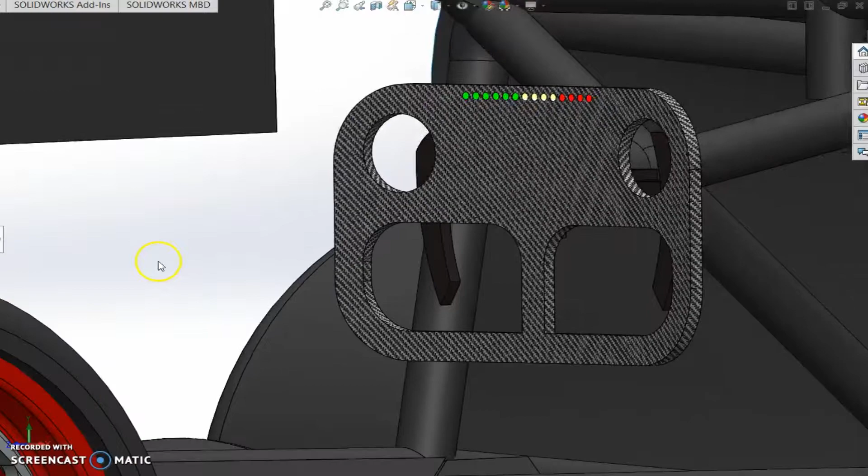The steering wheel will be manufactured using a CNC router that we learned about in class, which will cut a female mold into high-density foam that will later be used to do wet carbon fiber layups. Mated to the back of the steering wheel are paddle shifters and a mechanism designed by myself.

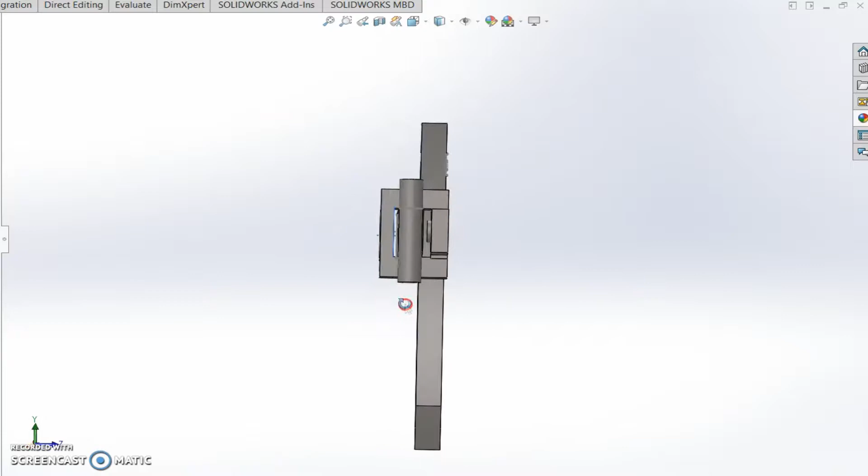At rest, the paddles would be connected via magnets, hence the two cutouts, and will rotate along on an off-the-shelf hinge. When initiated, the magnetic attraction would be released, providing the driver with tactile feedback, and at the end of the paddle's rotation, it will press a button that will activate a linear actuator and provide the quickest possible shift time. The paddles will also be made out of carbon fiber for optimal weight saving.

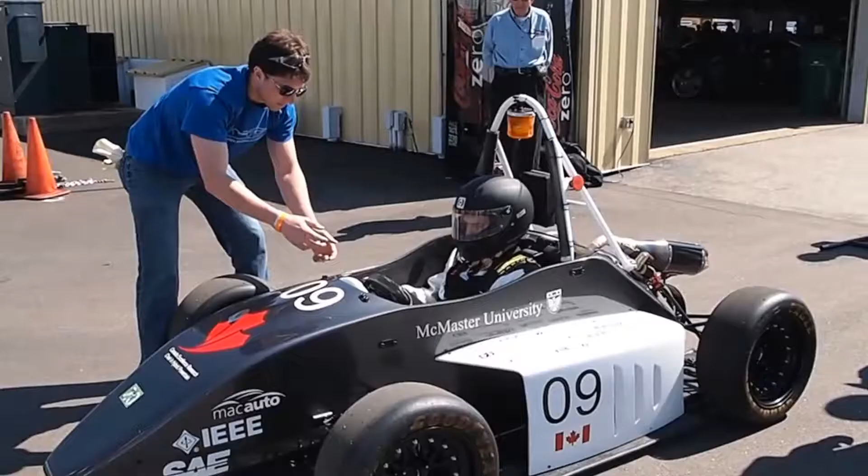In between the two paddles is a fully functional quick-release system based off another design but modeled and altered by myself for this year's car. This is necessary for FSAE's egress test, which requires the driver to disconnect the steering wheel and get out of the car in under 5 seconds.

I began the rest of the design of the car starting from the chassis and working my way through the body using Boss extrude and lofts. I used 3D sketches and weldments while basing the design on UCI's 2019 race car chassis. One of the challenges for this chassis was making sure the 2004 Yamaha R6 engine model would be able to fit snugly into the rear of the car. On the side of the chassis are side pods for better cooling, aerodynamics, and safety.

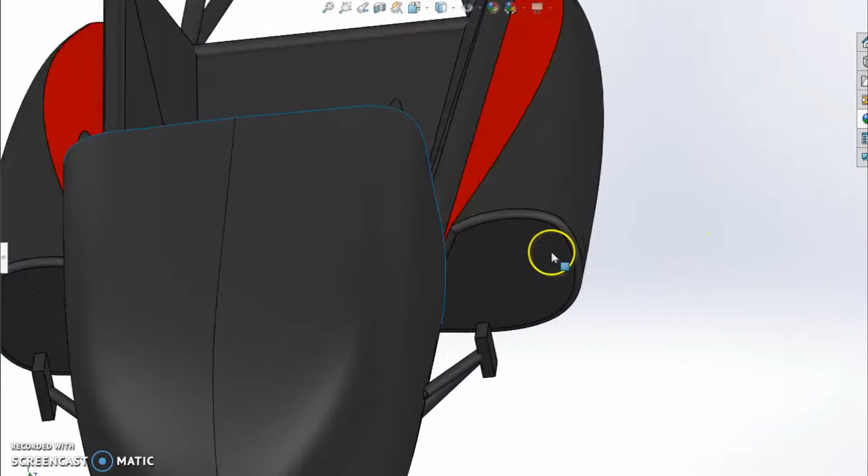Similar to the steering wheel, the seat provided is a seating design without cushions that will be CNC'd and go through carbon fiber layups. The front wing and rear wing are a combination of this year's and last year's aero package, once again made out of carbon fiber for the lightest possible weight. The aero components are attached to the chassis using weldments. This project had 18 parts in the assembly but really had over 30 individual parts.

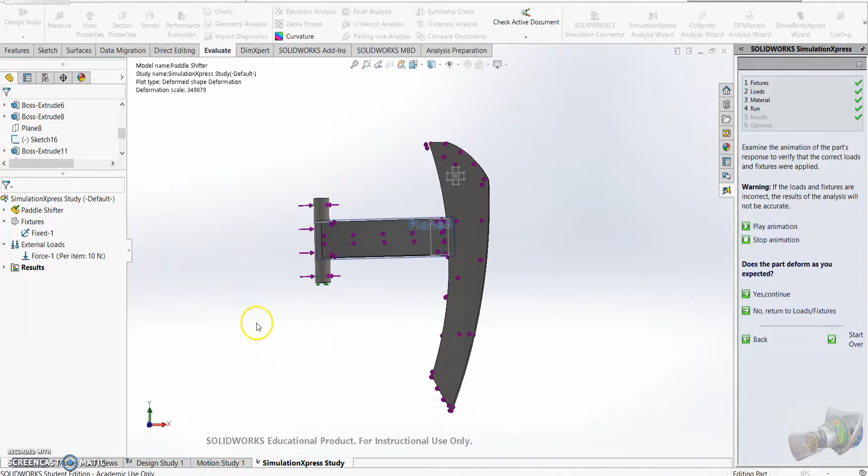I ran a simulation on one of the paddle shifting mechanisms connected to the hinge because of the drivers oftentimes slamming them to shift at the quickest speeds. So at an estimated force, the maximum von Mises stress I got was 2.295 times 10 to the negative 5. This project was very challenging and rigorous for me, but pushed me to my limits of CAD, which will ultimately let me contribute to the team even more.